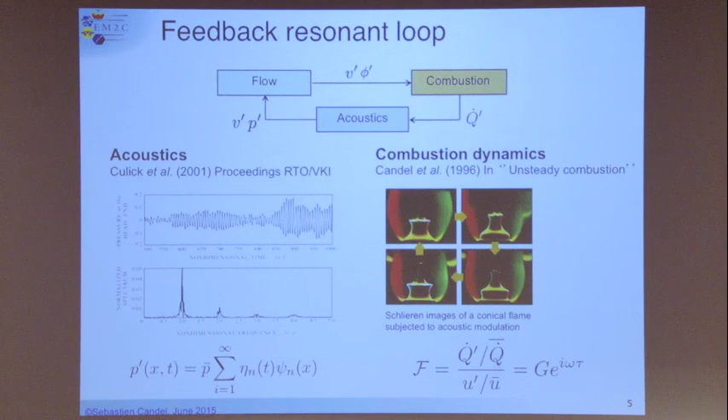We are interested in the limit cycles. We know that there is this very general framework where we project on the modes. We've looked at the combustion dynamics, and we've seen how to represent things of that kind using a transfer function.

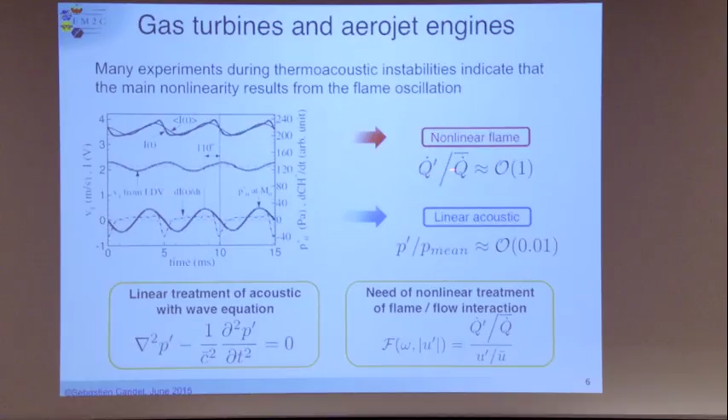In general, the acoustics in the systems are treated linearly. In fact, there are nonlinear features. Somebody at the beginning was asking, when you go to very high level of acoustics, isn't it necessary to account for nonlinear acoustics? Yes, probably, and there is work in that area. But what is most nonlinear is combustion. Combustion is much more nonlinear than acoustics. So, in fact, this is of order 1.

The fluctuations in heat release can be very large, while the fluctuations in pressure are perhaps not as large. And so the idea was to treat the nonlinearity by actually considering a family of describing functions.

Now, with respect to previous work in this field, there is, for example, the work of Ann Dowling, but this was purely theoretical. There was no comparison with experiments. So the first comparison with experiments is what we've done with Nicolas Noiray.

What you've seen in the previous slides is exactly the first, to my knowledge, a good comparison between theory and experiment, where you definitely see that you can calculate limit cycles, that you can represent switching, that you can represent triggering. All that doesn't exist in the literature before.

Just to say, when I say that, it's because in some papers we are not even cited, and people use the flame describing function. It's incredible. So anyway,

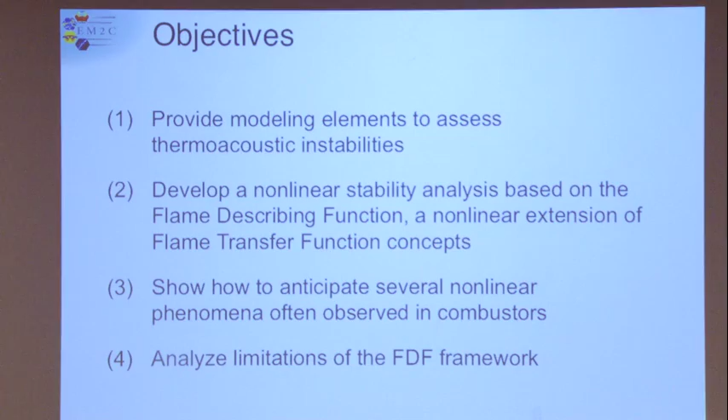The objective is to actually provide the modeling elements to look at that, develop nonlinear stability analysis, show how to anticipate nonlinear phenomena, and analyze also the limitations of this framework, because it cannot cover everything.

You have such a variety of possibilities that certainly this is good up to a certain point, and of course, then you have to find something better.

So the experimental configuration, and then we will look at linear stability, nonlinear stability, and the results of nonlinear modeling. But this time, you see the device has this additional feature.

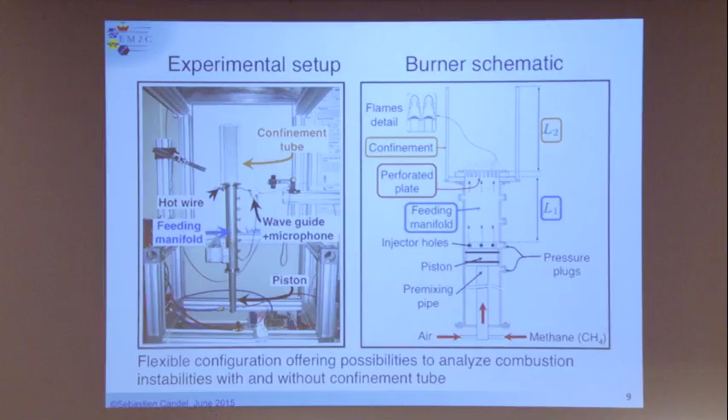You have a tube here, so it looks like a real combustor. Manifold, upstream manifold—you can change the length of your combustor, you can change the length of the manifold. And you have the flames here. You can even change the sizes of the flames, and you can play with the describing function of this perforated plate.

So by changing the size of the orifices and so on, you can change this FDF. For example, here you have the perforated plate. This is the piston where you inject the combustible mixture. This is a top view, and you see you have 420 holes here.

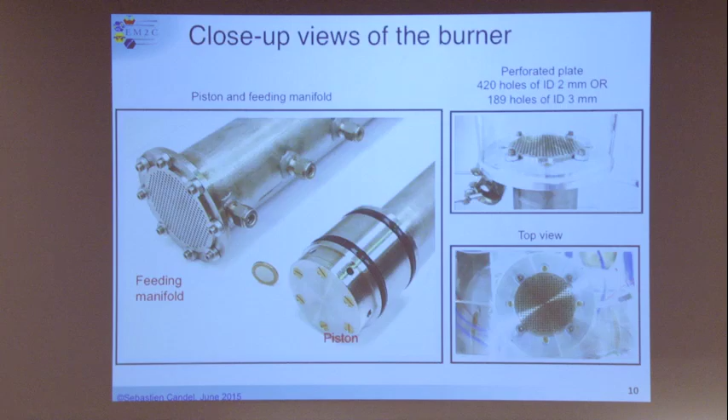This is the device. You have a photomultiplier, microphone—we set also a microphone at the back of the chamber here. You have a hot wire inside, so you can actually track the velocity fluctuations. You can put microphones upstream, so with 2 microphones you can determine the acoustic velocity. That's useful, since we know that the velocities in these channels are important.

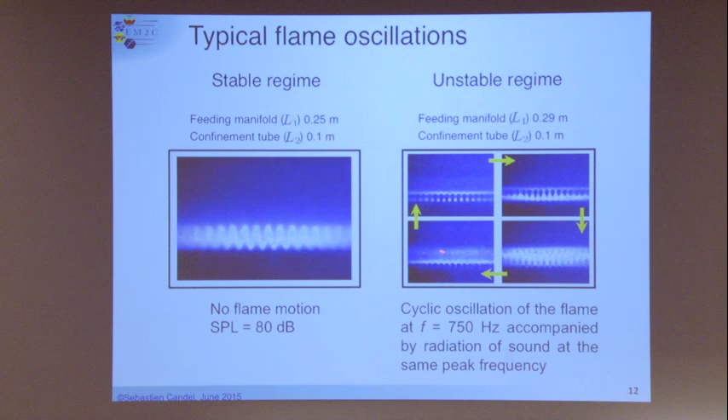This is typically the limit cycles that I was describing. We've seen that the flames execute this motion—all of the flames at once move up and then move down, and there is shedding of a pulse. This is a cyclic oscillation at this frequency, for example.

We've seen this film already. You have stable combustion in a very narrow region. In some cases, you don't even have stable combustion—the system is unstable for all lengths. It's nice to have at least a region where you are stable. Well, that doesn't work.

So what happens now when we have this combustor? Well, the behavior is somewhat the same. You see here a very high level of sound developing, so the system is pretty loud.

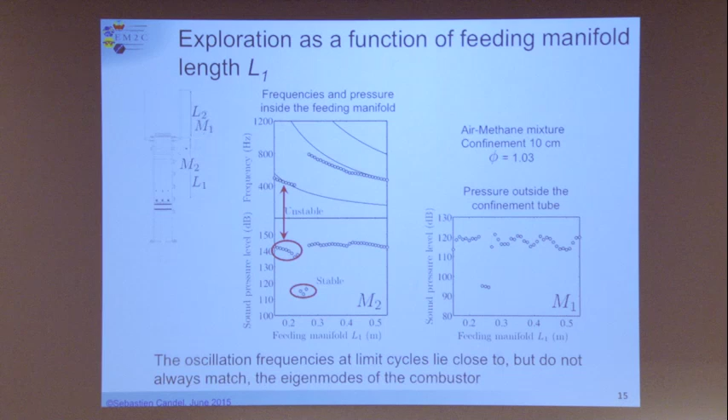So this is unstable, it's stable. This is again unstable here, it's a different mode.

As you change the size of the combustor, you see that the difference between the acoustic modes you can calculate and the frequencies that you measure becomes larger. You see here it's larger, and here it's even larger.

And here you see that there is no more stability. In this case, when your combustor is too long, essentially everything is all the time unstable in this particular situation. It's very weakly damped, so there is very little damping in the system, so the system is unstable everywhere. Here you still have some stability, but here you don't.

Now, there are 3 types of analysis that you can carry out. First of all, you do an acoustic analysis.

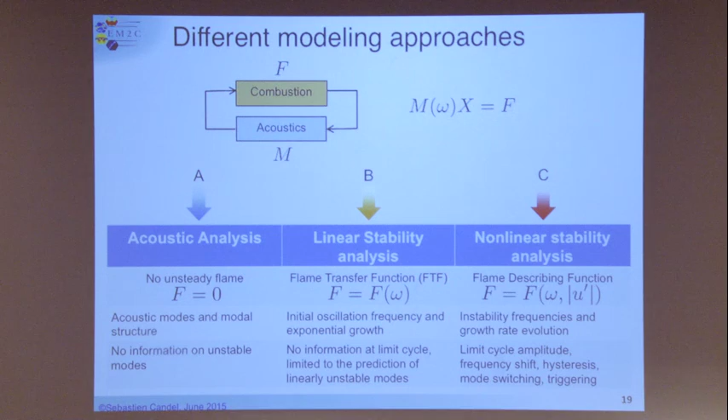This is just considering acoustics, taking into account the fact that on one side the temperature is higher than on the other side. You also take into account the fact that the area has changed, and you do an acoustic analysis. This gives you a dispersion relation, and you get the mode structures, but you don't have any information on unstable modes.

Then you take a transfer function. You assume that you have a transfer function. In this case, you obtain a dispersion relation which depends on omega, but you don't have information on the limit cycle. Then you assume that this transfer function depends on the level of the input, and this gives you the limit cycle amplitudes, the frequency shift during the development of this limit cycle, hysteresis, mode switching, triggering. So by doing that, you get all this rich physics coming into the picture.

So to do the acoustic analysis, you use what we explained in the first lecture. You have a duct here and another duct right here. There is a change in area. You change the density and the velocity of sound, the speed of sound, and you connect the two by the area change.

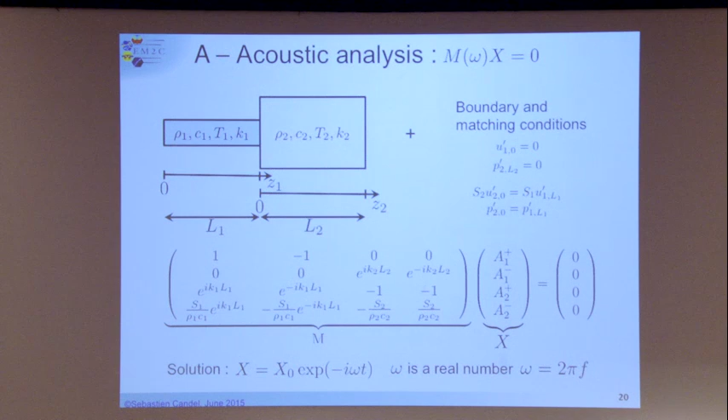You have a system which is homogeneous, and so you can find the roots of this system. You impose at that point matching conditions of pressure and volumetric flow, acoustics, plus the boundary conditions. Here it's an open boundary condition, here it's a closed boundary condition, it's the piston. And so this allows you to calculate these modes.

So the second is to do linear stability analysis. You take a gain like that, a phase which looks like that. You have this initial condition, you know the modes. So this is very useful because you can start the search of the roots of the dispersion relation from the modal frequencies, and you do that by continuation.

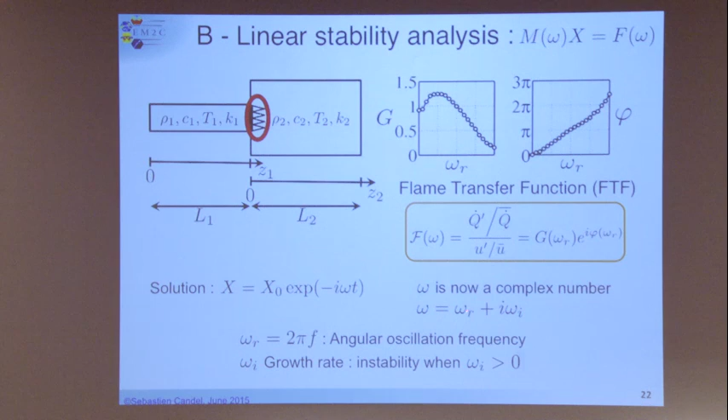You begin with what you know are roots, and then you produce an algorithm which will actually bring you to the values that you have. So this is how you get these new roots. It's good to do continuation here. And of course, if this is positive, it's a growing thing.

How do you determine this? It's just by placing a loudspeaker. You have this grid. You confine it a little bit just to be under the same conditions, and you can actually have a gain, and you have the phase, which looks like that.

So it's quite important. You can see that by simply changing the size of the orifices, you change the transfer function. You see this gain is here, it's now here. You see that the phase is growing like that, it's growing like that here. So by shaping the transfer function, you can work on your stability, on the dynamics, just by tailoring the transfer function.

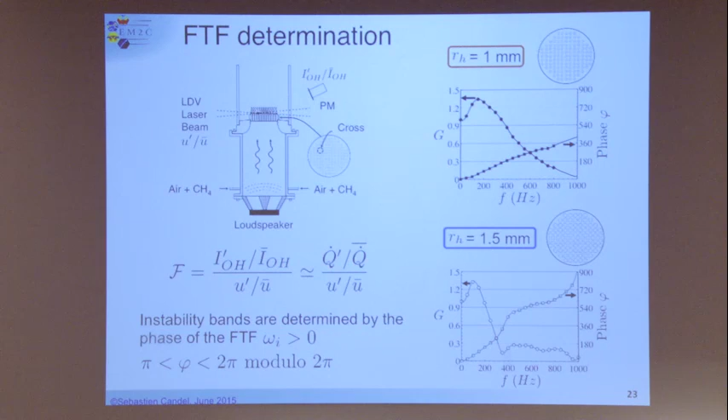And by using this linear stability analysis, you do get essentially what you find in the experiment. So these are unstable points. So the experiments are here.

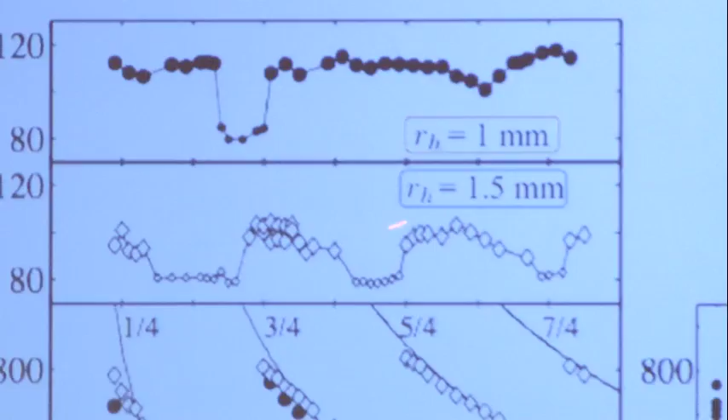Here you have experiments for the two sizes. You see the hole is 1 millimeter here, it's 1.5. You see that things change. For example, for this 1.5, the stability region is much larger here. The level is in fact a little lower.

You find that the points where the system is unstable for the 1.5 are here and here, while for the 1 they are here, so they are close to the modes you are calculating. These modes depend on the lengths. You see the quarter wave, 3/4 wave, 5/4 wave, 7/4 wave, and for example the 7/4 you can get with this 1.5. The main difference between the two is that the phase is very different in the two cases.

And so you predict boundaries. It is possible to show that the first band of instability is between pi and 2 pi here, and so the predicted unstable boundary for a hole of 1 millimeter is this one. So basically all the black points do fall in this region.

Now if you take the 1.5, the bands of instability are this one, I think, and indeed these points fall closely in here. And then there is another band, which is here, and these points fall there. But you see that there is a difference - you over-predict the regions where the instability will occur. But it's already good, so already this linear stability gives you a fair description of what goes on.

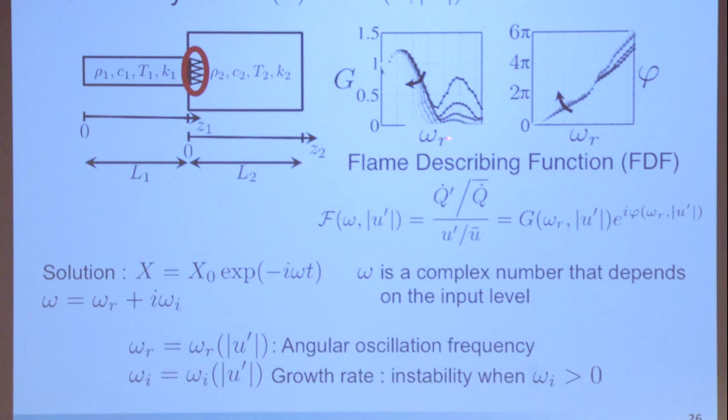It's already a good thing. But of course, when you do the nonlinear analysis, that is you use the changes in the gain and in the phase, then you're accessing the possibility... you access the...

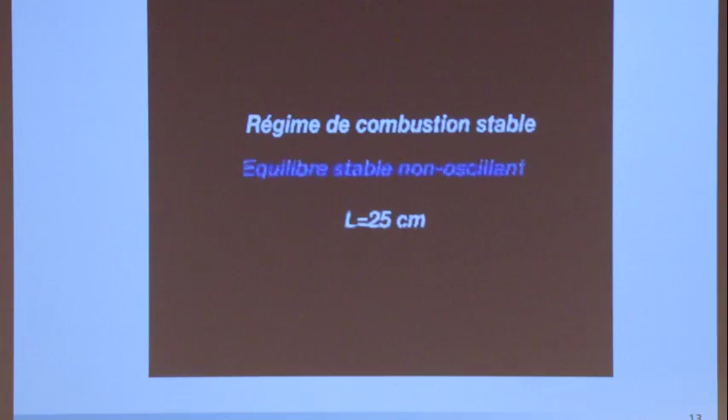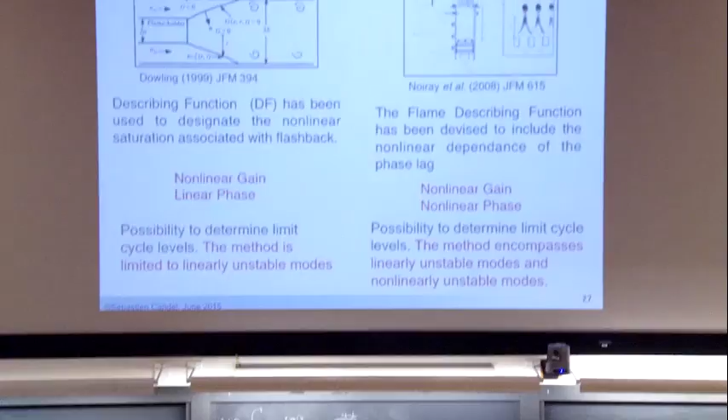So you see here, by doing that you augment your view of the problem to a large extent, because you now access the limit cycles, the switching phenomena, triggering, and the hysteresis. You can explain all that, which is much stronger than what you can do with linear analysis. Linear analysis, for example, doesn't allow you to do triggering - you cannot deduce triggering from linear analysis.

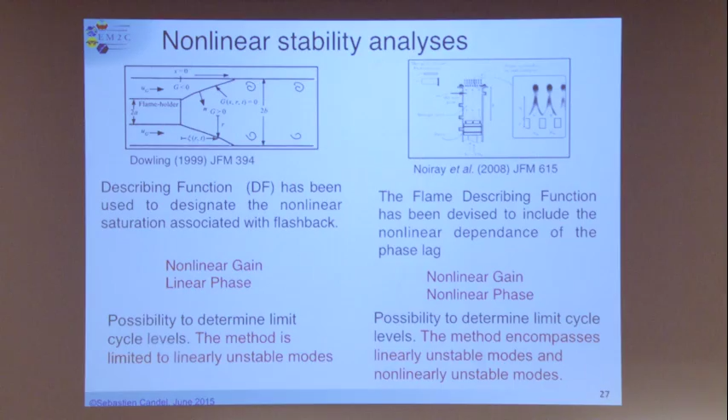So this describing function was used, for example, by Ann Dowling. She was doing calculations of a flame in a duct - it's a ducted flame, this is the flame holder. This is a purely theoretical calculation of the dynamics of that flame. You see the flame - there is a saturation of the heat release fluctuation for that flame. And by using this saturation and this concept of describing function, you can actually represent some of the mechanisms here.

But there is no comparison with the experiment. And here, in Noiray et al. in the Journal of Fluid Mechanics, we do have a comparison. It's not perfect, but it's quite nice - we were very happy with that. Actually, we predicted things and then went to the lab and found that what we predicted was there. So the lab is 50 meters from the computers, so that was very easy, but it was wonderful.

So the difference here is that one doesn't depend on the amplitude, while here it depends on the amplitude. And you see there are dependencies - not only the gain, but the phase depends on the amplitude.

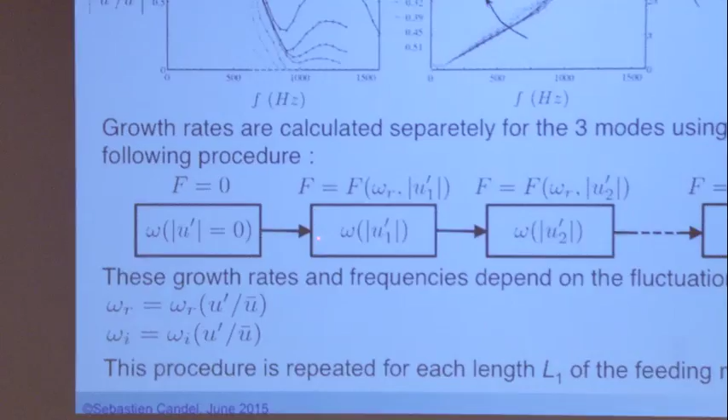So how do you cope with that? Well, you start with a value at 0 - these are the normal modes. And then you increase the value of u prime 1, and increase it, and increase it. So you do continuation here, and you can obtain these trajectories. So the trajectories tell you the story.

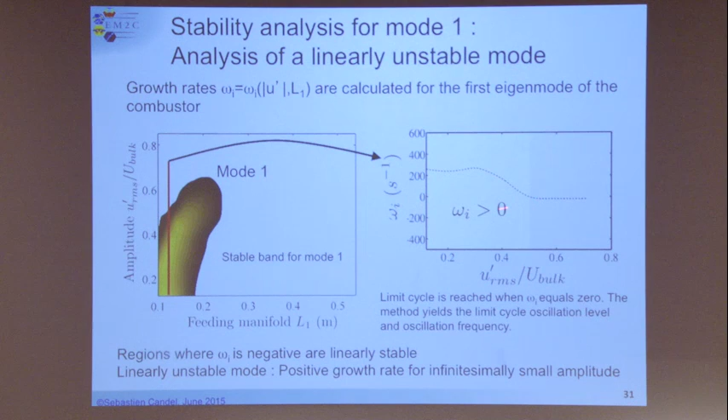And so, for example, you get mode 1 here. These are trajectories which are like that, and then you are here. This is a case where you are negative, so in this case this is stable here. But if you jump to that point, it becomes unstable. And then you have mode 2, which is shown here.

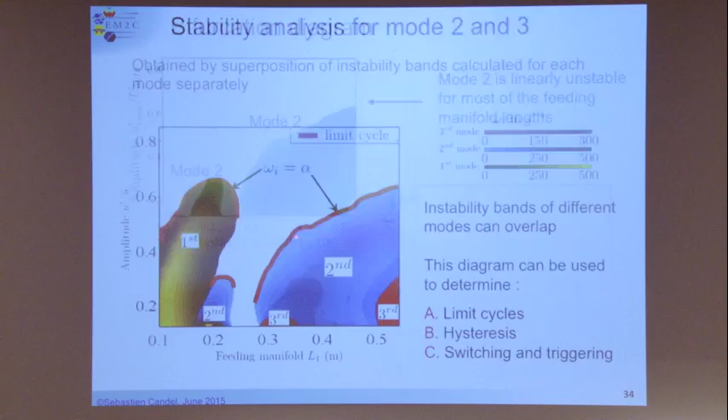This is now with a combustor, and what you can predict is you go like that. You have also the second mode, which you will access. Then the third mode here - the second mode, I'm sorry - and then you have the third mode, which is embedded here if you go a little further.

So what you see first is you travel on that - this is the initial mode that comes in. And then you jump to this point where it's stable, so you don't see that mode here. And then you move on this frequency, you get to this second mode, and you go here. And if you do it the other way, that is you go from here, you get here, like here, and then you're stable, more or less.

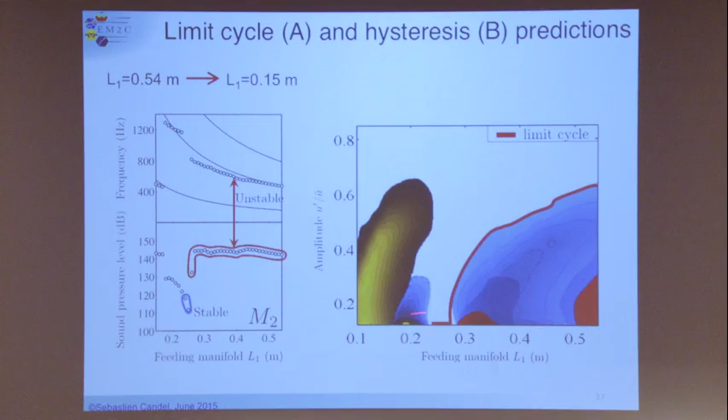All right, anyway, that was essentially what I wanted to tell you about this. Well, there are other things, but okay, we have to move.

So let's move now to the passive and active and dynamic methods of... yeah, here it is.

Let's begin with this one.

So one objective is, of course, to reduce oscillations, to be able to reduce this level of oscillations. So the idea, you see in the last example, all the flames were moving at once. All these flames were executing the same motion, and the idea was actually to try to modify that.

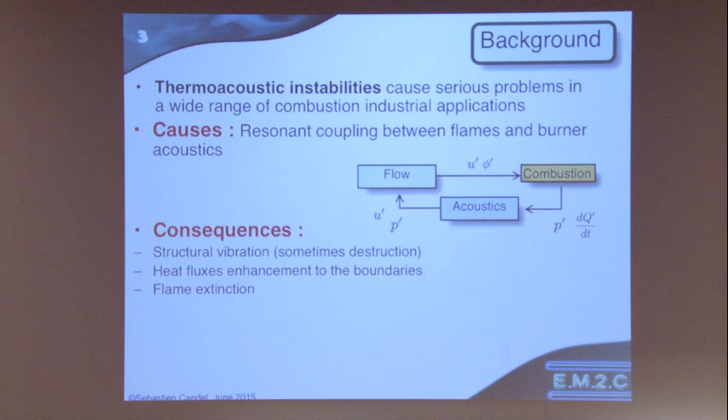Again, we have this resonant coupling between flames and burner acoustics. Consequences can be very detrimental: structural vibrations, heat fluxes, flame extinction. Solutions: possibly active control, but this is difficult to implement. Passive control using Helmholtz resonators or quarter wave tubes or acoustic liners.

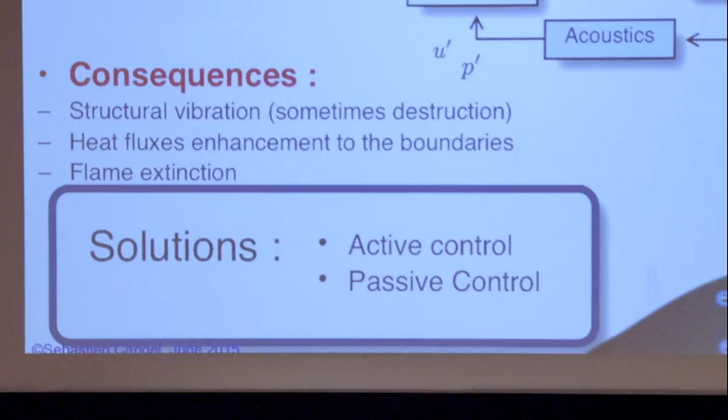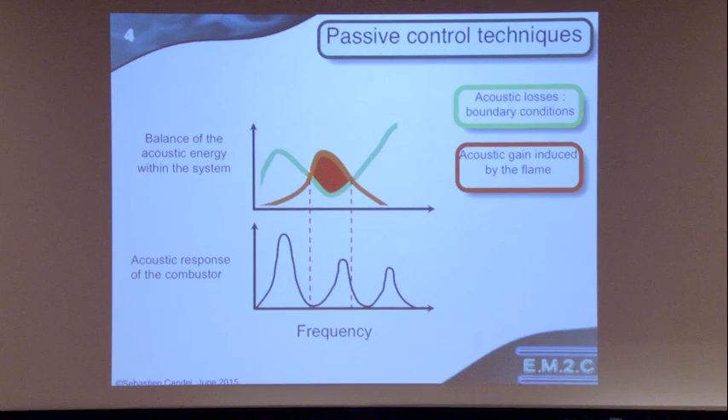But then there is another idea. If you look at the balance of acoustic energy within the system, there's the gain and there's the losses. Suppose you have just a mode which can come in here - this is the response of the combustor. If the gain is larger than the losses, then you can have instability. So the acoustic energy balance is positive and there's potential thermoacoustic coupling.

So first strategy: modify the losses, put a Helmholtz resonator, perforated screens. There are systems using bias flow perforated plates, which have a very strong damping capacity. Difficult to arrange, but a good damping capacity. So there are various possibilities here.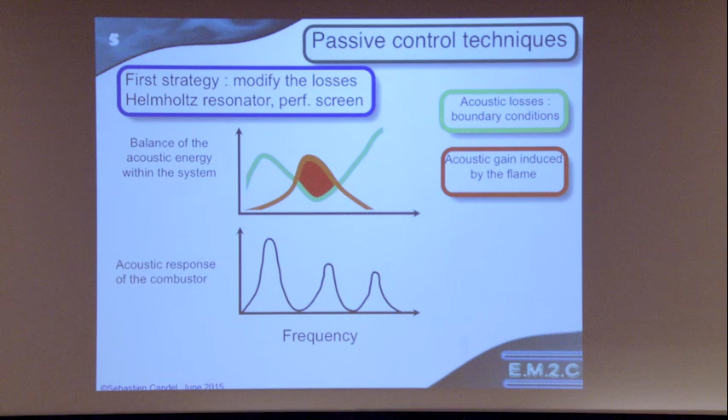One way is to enhance the losses. The second strategy is to modify the gain by acting on the flame dynamics.

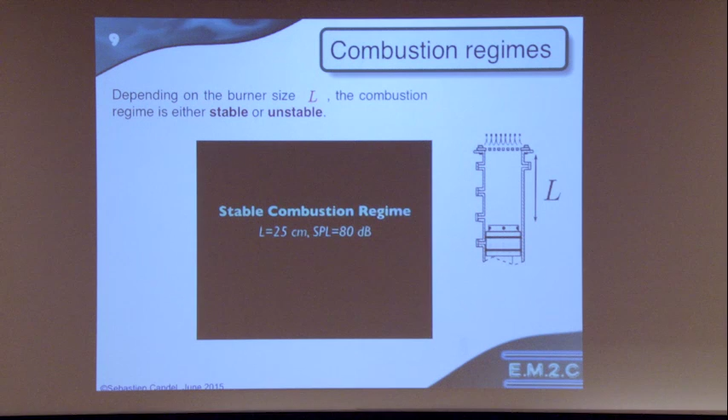So what is the experimental configuration? It's this one. We have all these flames which are running here, and we've seen that they are all like soldiers in a parade. We've scanned the various lengths, and we've seen that under certain conditions, this is stable.

And if you change the length slightly, it becomes unstable. Of course, you don't want that. So we want to modify this behavior. The oscillation cycle is this one, we've seen that. So we want to modify that.

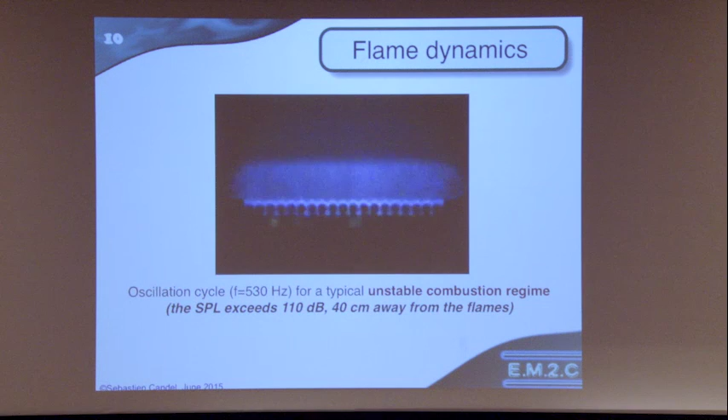As I told you, this is unstable here, unstable here. There is just a small stability here. So of course, what you can do is put more damping. But the other way is to try to modify the dynamics of the flames. And we've seen this type of behavior here.

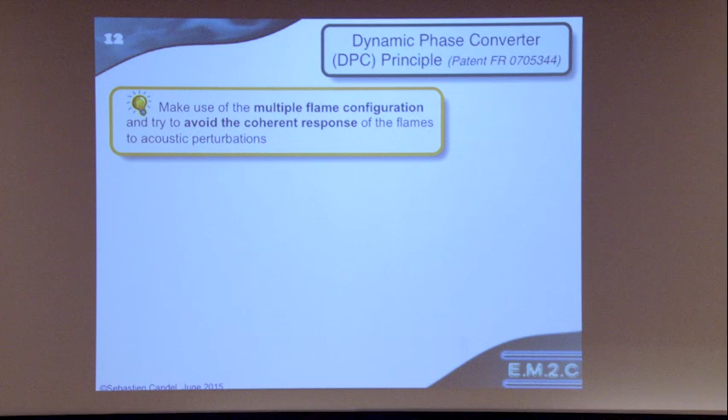Make use of the multiple flame configuration and try to avoid the coherent response of the flames to acoustic perturbations. So we actually got a patent for that. When you want to patent, you patent a system.

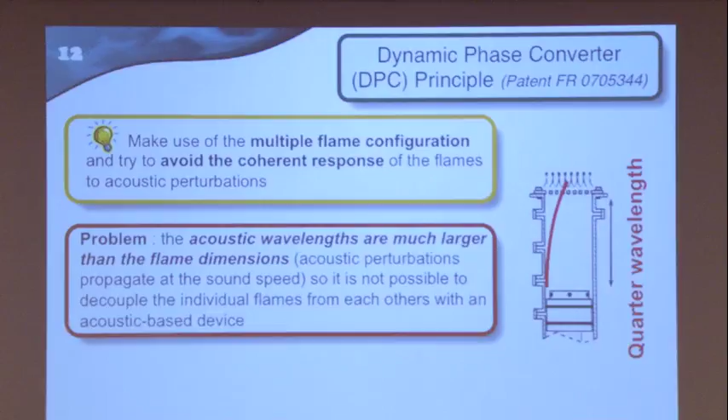You see, the acoustic wavelengths are very large compared to the flame dimensions, so it's very hard to do something on the acoustics. But if you can go from the acoustics into a convective mode, then the convective mode has a wavelength which is much smaller because the velocities are much smaller. Then you can play with the phasing of the system and transform the acoustic perturbations which impinge the flames into hydrodynamic perturbations, vortices which propagate at the mean velocity, much lower than the speed of sound.

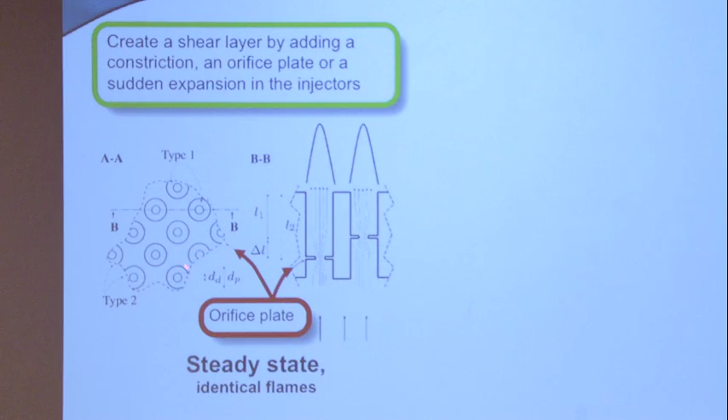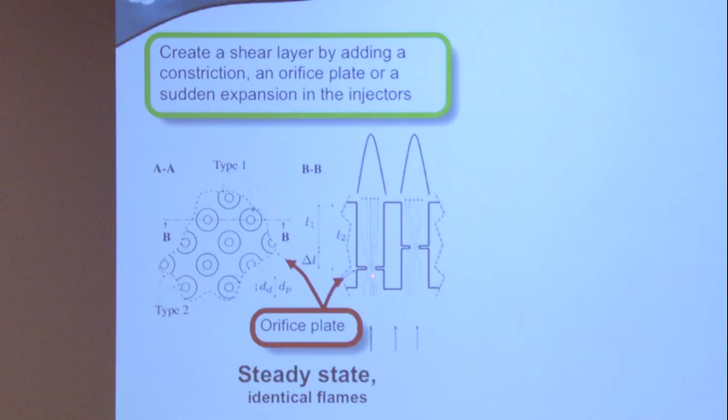So the system is here. It's very simple: you put a diaphragm here and another one here, and you place the diaphragm at a certain distance from one to the other. So you have all the flames here, and the vortices are shed from this diaphragm as the acoustic waves come in, and the phase is governed by this distance.

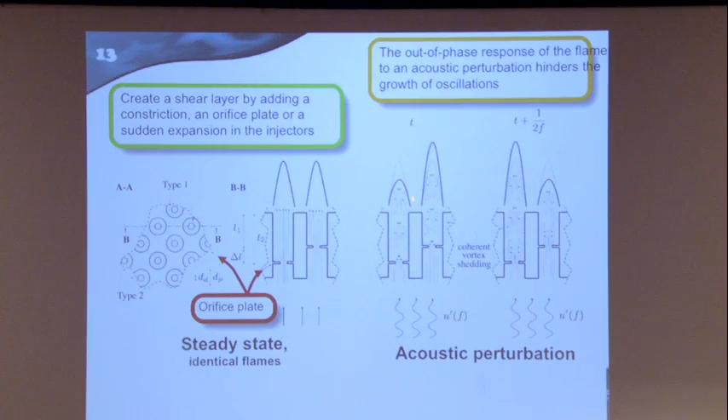So like that, you can change the phase, and if you tailor that for a given mode, it is possible to have a phase opposition - perturbations which will be in phase opposition with respect to the flame. So this is the idea: you shed coherent vortices here, and the flames will act like this - this one will be shorter, while this one will be larger, and then the other situation will be obtained.

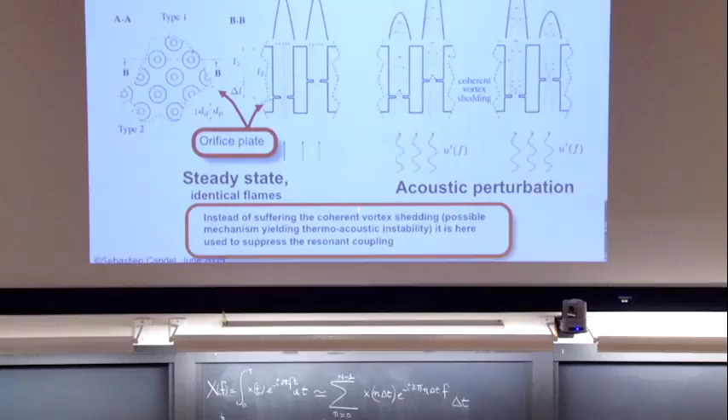So the idea is just to place these diaphragms in all these orifices and move them one with respect to the other in a good position. What is good, you will see. Like that, you don't have this coherent vortex shedding, which produces this motion of all these flames. The phase is governed by 2 pi f delta L over the convection velocity here. So you have to study the convection velocity so you can actually separate these two diaphragms.

And we actually verified that this principle works in a non-reactive system. You just place a tube, and you have a loudspeaker at the bottom. You force the flow, and you put a diaphragm, and you can see the vortices shed by the diaphragm. Here you see a laser Doppler setup just to see the velocity. So the principle is just to place the diaphragm, and you transform the pressure wave into a vorticity wave, partially.

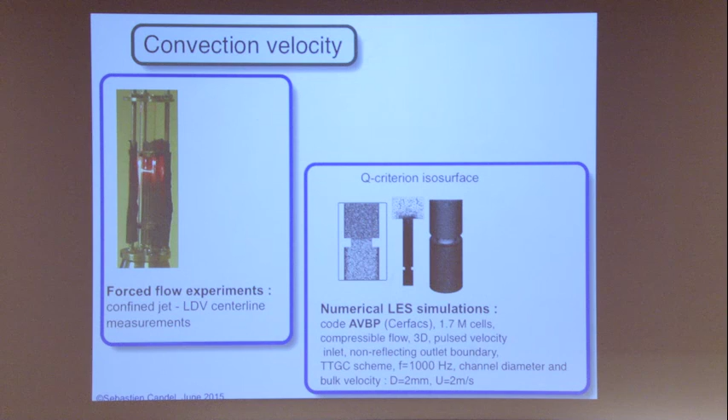And you can see these vortices, these are vortices shed by the diaphragm as you place acoustic waves. So this is actually one way to reduce the level of the acoustic wave, by having a diaphragm, because part of the energy goes into the vorticity.

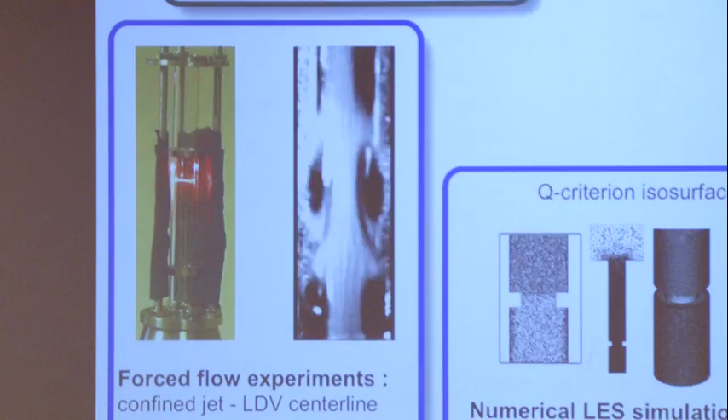And we've done numerical calculations as well using AVBP. Here what you see is vortex rings. What is plotted is the Q criterion. So it shows you the vortices that are shed from this diaphragm as you impinge on, as you have incident acoustic waves.

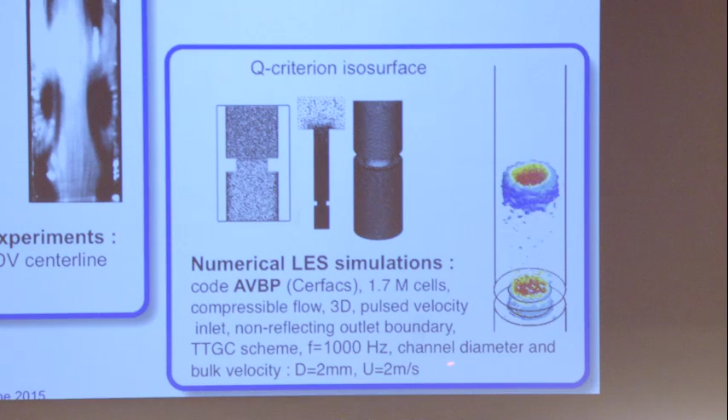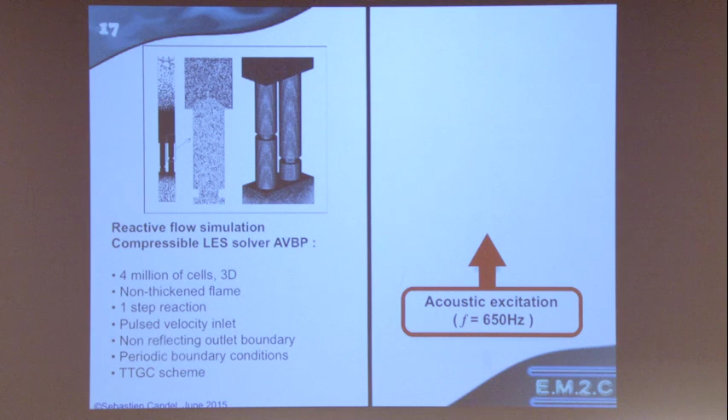So now the other thing is to do the calculations not only on a single flame, but on two flames. So these are the channels. You have the diaphragms here. This shows a little bit of the gridding required, because these are thin flames, so you need very fine grids to calculate these flames. And this is what you get in 3 dimensions.

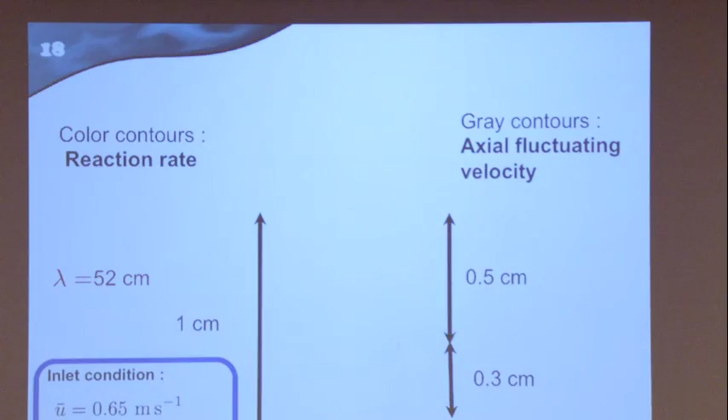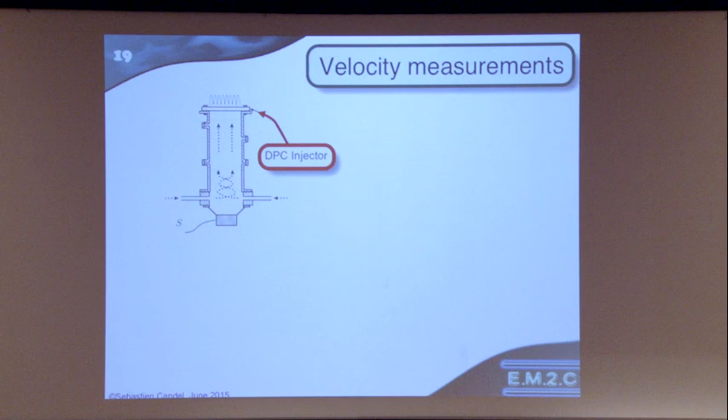So you have the two flames moving while vorticity is being shed at the bottom, and you see that they are moving in opposite directions. You can see also the velocity field plotted here, and you can see that even better in this here. So now we call that a dynamic phase converter, because you convert the phase, it's dynamic, it's nicer, and now you have these flames moving in opposite directions, and so you can try to see if it's operational.

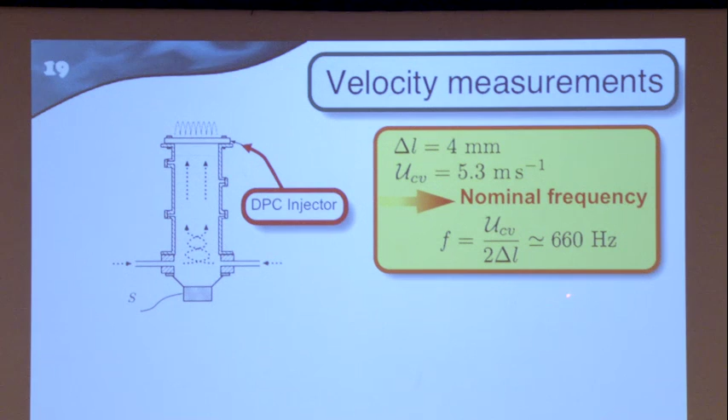So in this case, what we do is we excite. This is a case where we place this system inside the perforated plate, and we excite here at a given frequency. And what is seen is that indeed you have this. This is on design. What is obtained here is the velocity for two flames. So you see one is moving like that, while the other one is moving the other way.

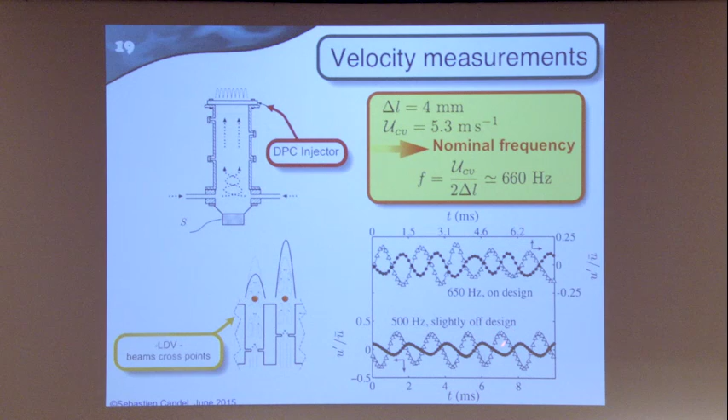And even under off design, even when you are not at the perfect frequency, which is shown here, you have an opposite motion. So the flames, some flames will do something while the others do the opposite. And these are films which show that in practice. Here the flames are moving just like that, but the film doesn't work for some reason. While here, the film, the thing is moving up and down like that. So definitely what was calculated is indeed what is observed.

And now you take the chemiluminescence in the classical case without the DPC. This is what you inject, and this is what you see in terms of chemiluminescence. So all the flames have the same heat release fluctuation at the same time.

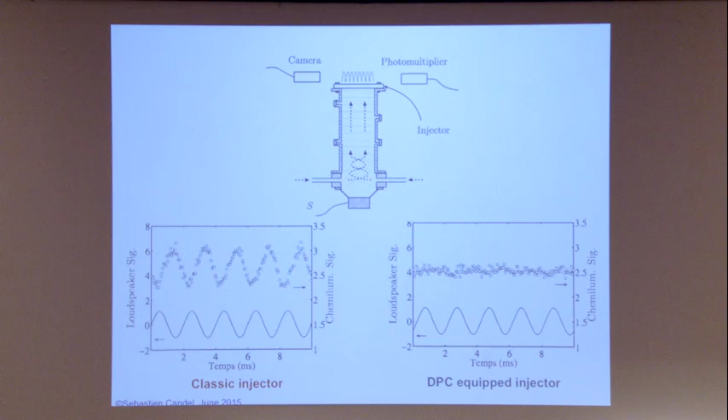While in this case, you put in the loudspeaker, it operates, and now what you get is essentially a constant signal, despite these oscillations, because some flames are going up while the others are going down, so they compensate. So in this case, we are able to compensate the motion, and this set of flames becomes essentially insensitive to the perturbations.

And then we looked at this DPC device installed in the system. So this is the classical injector, shown as triangles, and the injector including constrictions at the same axial level, not staggered. These two will generally give the same answer, you will see the same. And when the point is staggered like that, it's a dynamic phase converter.

So this is the level, the SPL, and these are the frequencies observed. When we put the dynamic phase converter, we are here, so you see we bring the level down. Still there is a frequency coming in, so we cope with some of the modes, but a higher mode can occur, so you have to damp that as well. But nevertheless, the level is lower.

And here, if there is no staggering of these constrictions, you see that the response is the same here. The diaphragm is here, so basically the response is about the same. But with the DPC, it's lower.

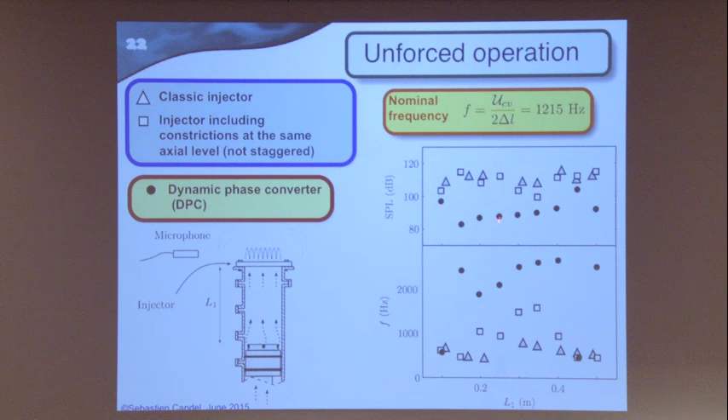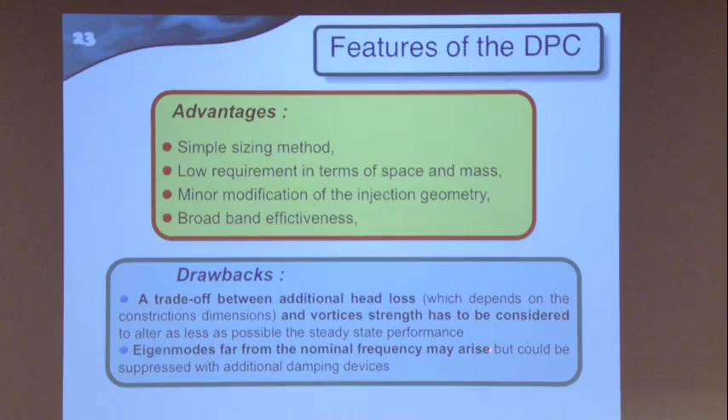So it's a simple sizing method, low requirement in terms of space and mass, because it's just diaphragms that you include in this perforated plate. Minor modification of the injection geometry and broadband effectiveness. Drawbacks: a trade-off between additional head losses, there is a little bit of head loss. Eigenmodes far from the nominal frequency may arise. So there is no solution which is perfect, because this is how everything is. There is always a drawback, but nevertheless, it's something.

New passive control strategy: a phase converter was successfully tested numerically and experimentally, under forced flow conditions and without forcing.

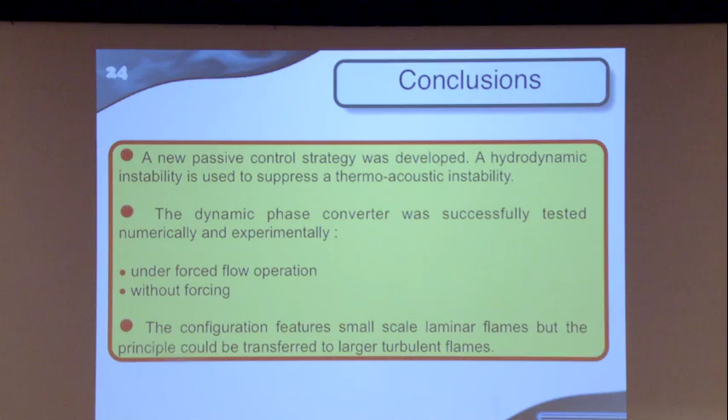Do you have any questions here? Did you also try changing the various sizes of the orifices as well?

The principle, I think, is working for the different orifices, but of course every time you have to do a new mechanical perforated plate and so on, and at a point you get bored by that. So we didn't do all the systematics, but the principle, what you want is to really demonstrate the principle. A lot of people put patents without even demonstrating anything. So here, we wrote a patent while we had clear demonstration that it was working. Of course we didn't do all the parametric studies. In France, a thesis is 3 years, after 3 years you have to be done, so we need very, very clever students. Nicolas Noiray, for example, did numerical work, the AVBP calculations, experiments, the FDF, and also this invention, this innovation, all in 3 years, and you're done. So after the 3 years, it's a new topic, and there is a strong constraint in France: the thesis has to be a finite time, and after that support vanishes. This is why we didn't do all the systematics that could be done.

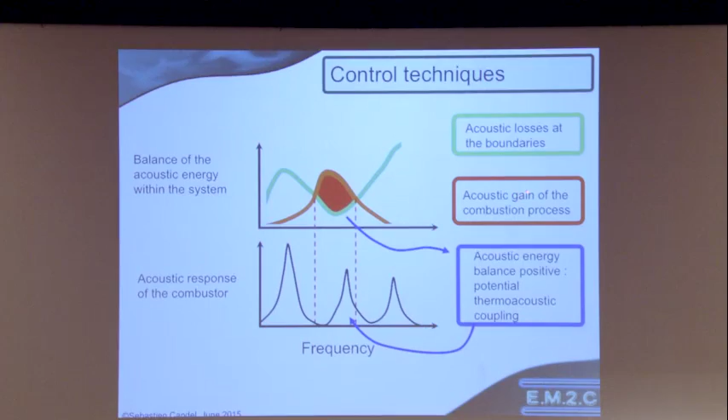So again, to place all that in perspective, one way to reduce the possibility of instability is to increase the losses at the boundaries. The other way is to reduce the gain of the process by working on the flames, changing the shape of the flame. We've seen that different flames have different amplification characteristics, so by doing that you can change things. You can change perhaps the phase also of the dynamical response of the flame. And so basically the idea is to work on this. Sometimes you can also change the resonant frequencies by modifying the geometry, but that's a more complicated thing. So the idea here is to look at the balance equation of acoustic energy and try to see if you can reduce the gain, or increase the damping, or have boundaries which are more damping.

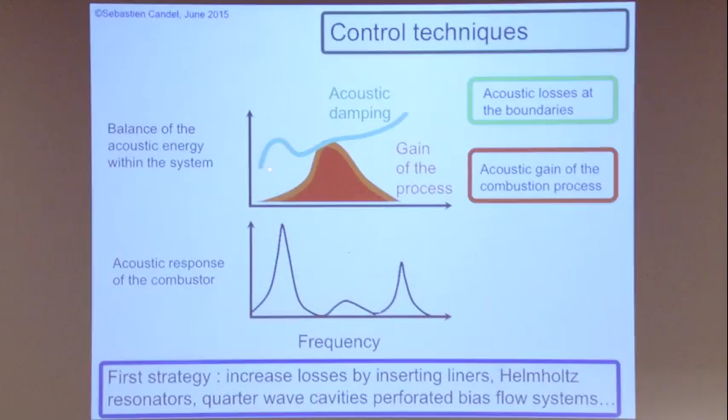You can include, for example, an acoustic liner, something which will bring in damping. Very often it's quite difficult. You can also plug in passive systems like quarter wave waveguides or Helmholtz resonators. So this is by increasing acoustic damping — you are above the gain here. So increased losses by inserting liners, resonators, quarter wave cavities, perforated bias flow systems. These are interesting devices.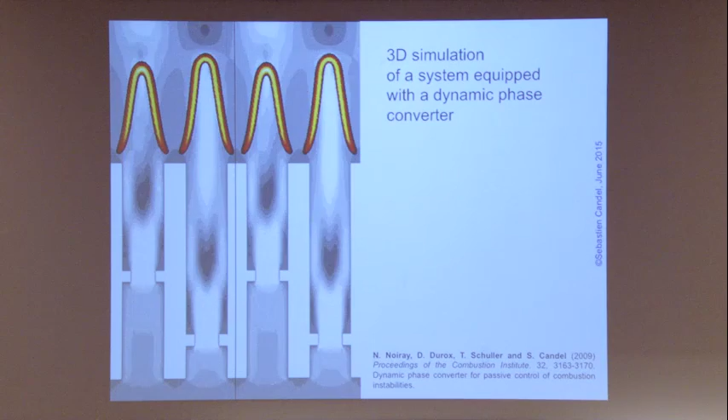This is just a periodic description of these flames that we've seen; I just put the same picture here again. So like that, you have the impression that you have 4 flames and not 2. It's just to impress you. So here you see the film — the flames are moving up and then down, while here they move up like that and then down like that. And so this levelizes things, makes it flatter in terms of gain.

So now the idea is you have the flow, combustion, and acoustic feedback here. Why not include an additional loop: use a signal from the combustion process or from the pressure, send it to a controller, use an actuator, and act on the flow to eliminate the perturbations. So this is...

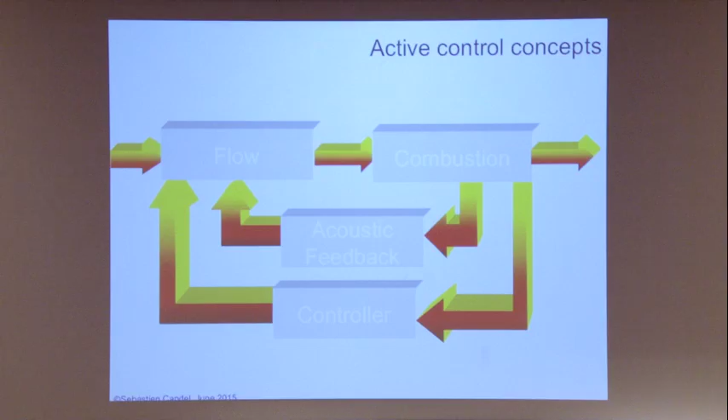An idea that, in fact, is very old. It has been revitalized in acoustics. People wanted to actually destroy noise by counteracting noise — just the fact that these are waves, and if you interfere with waves, you can actually reduce them. This is a principle that is, for example, used in headsets. When you take an airplane, you can have a reduced level of noise with certain headsets, which make the pressure fluctuation at your ear essentially close to zero by just doing active control. It's an active control device which is now available, publicly available.

How effective is it? Have you used such devices? It's effective? Yes, so it reduces the level.

This is based on research on these active control techniques. It's based also on the fact that you can now put controllers which are adaptive — you have an adaptation to the type of signal that is being perceived, and by suitable implementation, you can bring it down. The other application of such concepts is echo cancellation. You know that when you speak to a country which is very far from your own, for example Australia, you have a certain time lag because propagation takes a little while to go from here to Australia, and it will come back to you through the network. If the delay is sufficiently long, you have a hard time speaking. When you hear your echo with a sufficient delay, it prevents you from speaking — you are unable to speak in your own reverberation.

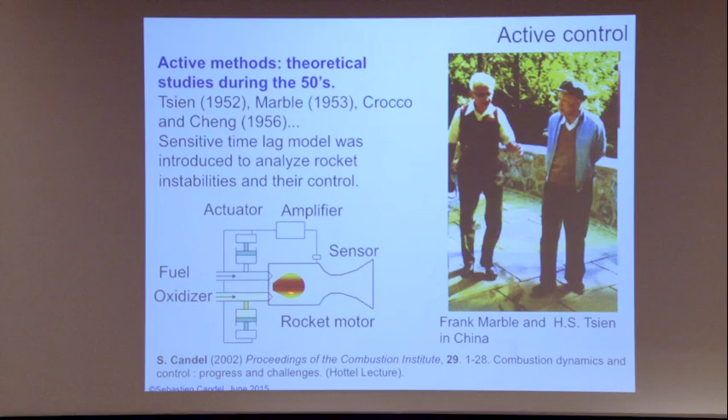This is a picture of my advisor, Frank Marble, and H.S. Tsien in China. They met many years later. They were very good friends. This is a picture of them in a garden somewhere in China.

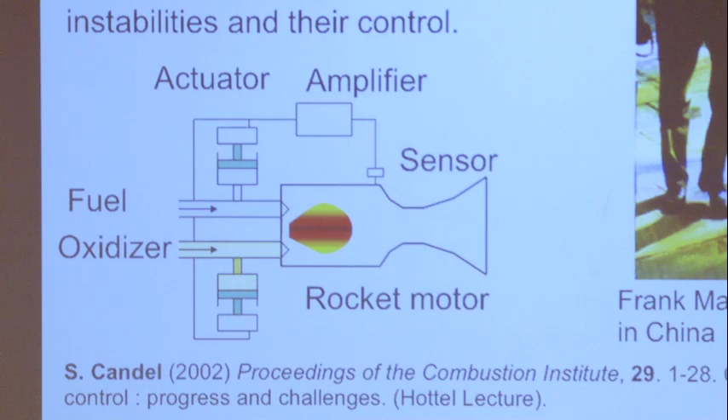So this was proposed, but was never experienced. A lot of calculations were done at the time to demonstrate that this could work, but it's already a complicated system. First of all, the rocket engine is already quite complex. When you look at what happens around the chamber, you see turbo machinery, a lot of piping, gas generators, and a lot of things. So it's hard to believe that you can, in addition, put something like that.

But it was looked at. More recently, in Great Britain, people started working on active control, inspired by active control of sound. This group is around Cambridge. We also started looking at that at about the same time with Thierry Poinsot. He was doing his thesis in our lab, and we demonstrated, for example, adaptive control here.

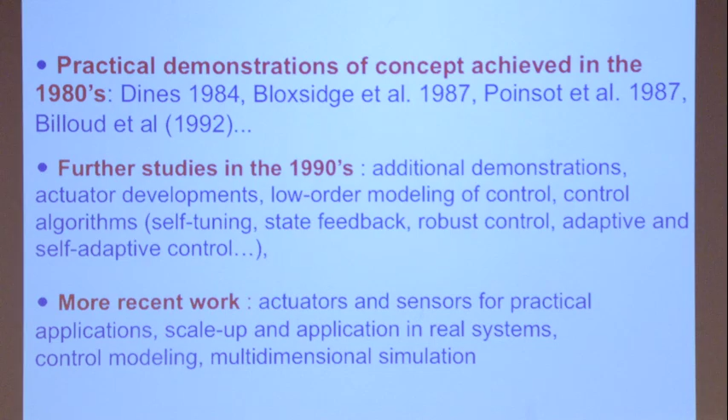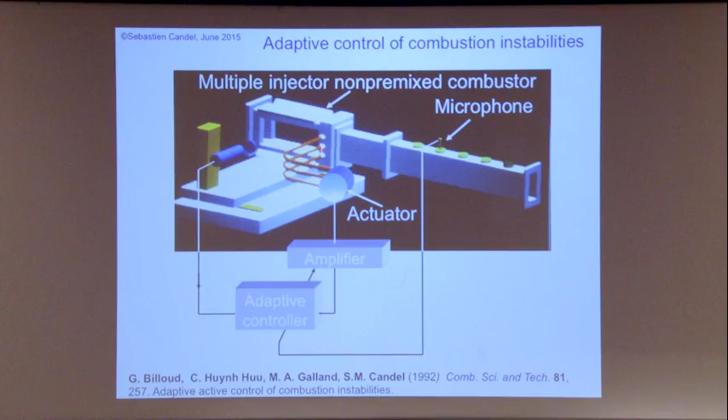And this was finally developed into systems which could be actually included in a practical configuration. Let me show some of the setups. For example, here you have a microphone. This is a duct. You have three injection pipes feeding non-premixed flames.

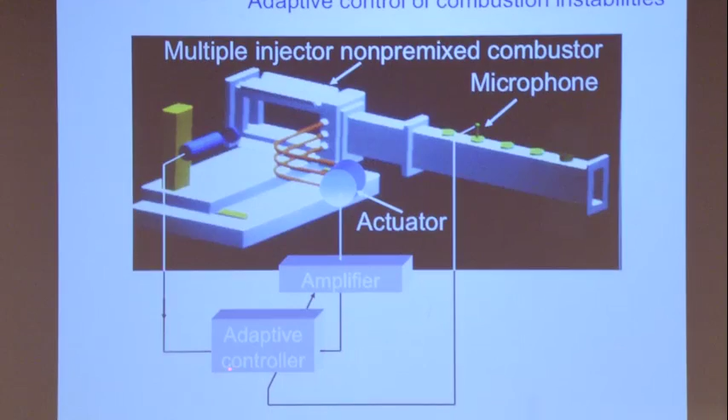A number of you have asked about the dynamics of non-premixed flames. In this case, it was a non-premixed system. We take the microphone signal and use it to adapt the controller so that the signal perceived by this photomultiplier is reduced, so that the heat release fluctuations are reduced.

So the method is to take this signal, send it into the adaptive controller, which is optimized to reduce the microphone signal or the heat release, both of which are in fact related fluctuations, and send it to an amplifier, an actuator, which acts on the fuel manifold here. Like that you can control this device.

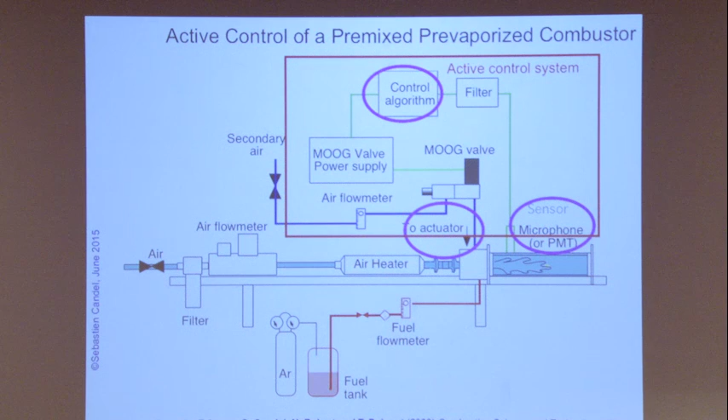Another configuration is this one. This is more practical. You have a Moog valve, which has a fairly good bandwidth, you can modulate up to 400 hertz. You take the signal of the microphone, send it to this control algorithm, to the Moog valve, and modulate the flow that goes into this injector. The fuel is here, and what you are modulating is the airflow. This is reported in this paper.

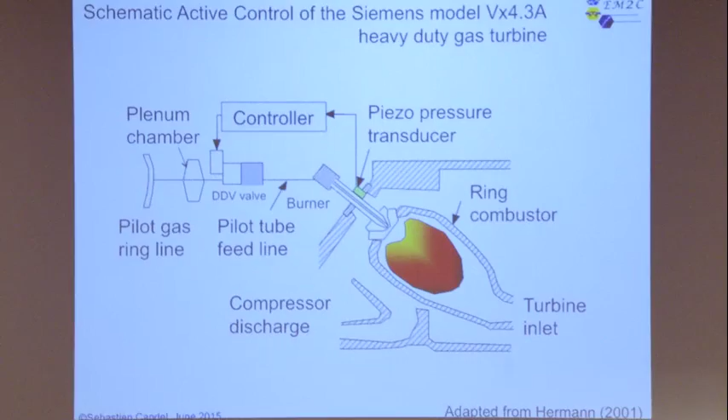So the system was implemented in a gas turbine. Siemens had a problem with its gas turbines - they could not reach the nominal power value because of oscillations. So they decided to put a controller, a Moog valve, on each of the burners. All the burners were equipped with these valves, with a control system governing the whole thing, and there are various technical aspects to that. They were able to operate this gas turbine, a full-size gas turbine, using active control.

So in this case, this was a gas turbine, fed with gas, so what is being modulated is actually the gas, the mass flow rate of gas.

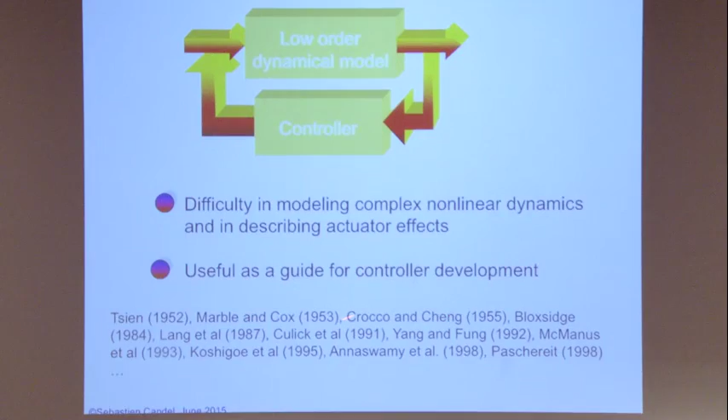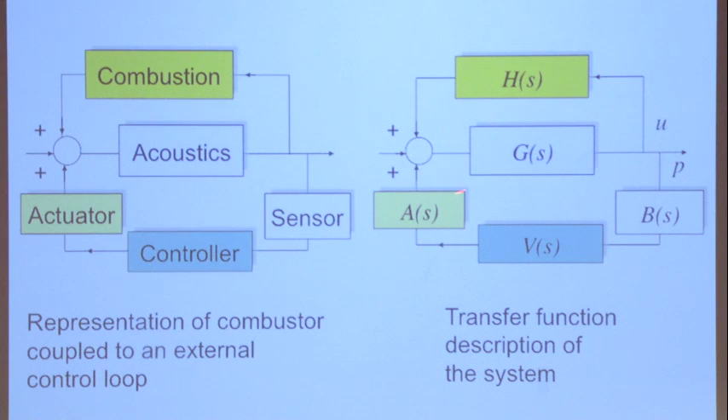There has been a lot of theoretical work. A number of people have done theoretical work using essentially control theory ideas, transfer functions. You have to model something like that, a loop between sensor, actuator, controller, and on this side combustion and acoustics. So it's important to understand the combustion-acoustics interaction so that you can control it. You can describe everything in terms of transfer functions - the variable S is the Laplace variable - and you can actually study adaptive control. We've done a lot of work on that.

One thing which is interesting is to try to do that numerically. Perhaps I will stop here because it's 11:05.